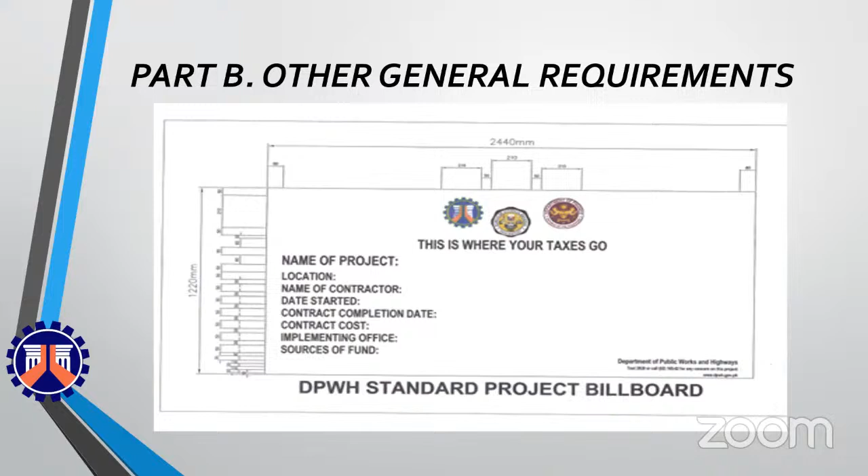Minimum material testing equipment for small contractors, for Contract ID Numbers 25D034, 42, 44, 37, and 58. Showing you the minimum materials testing equipment for small contractors.

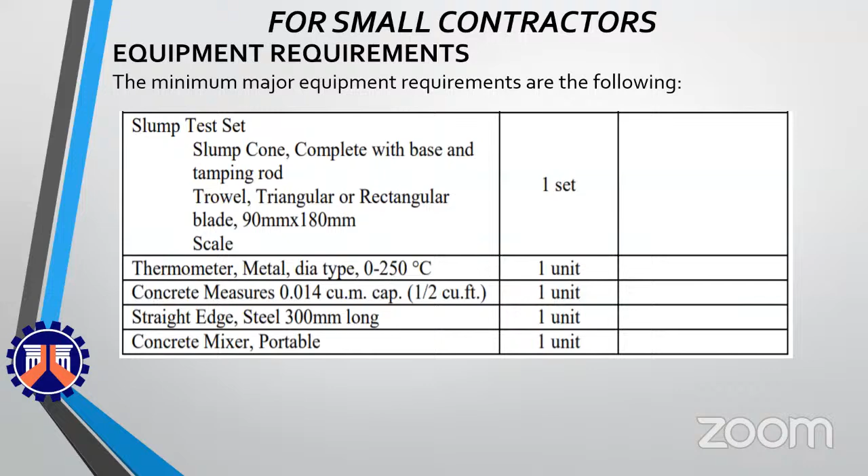Minimum material testing equipment for medium contractors for contract ID numbers 25D033, 30, 31, and 59. Showing you the minimum materials testing equipment for medium contractors.

Contract ID number 25D033, construction of Dasmariñas General Trias Tanza Diversion Road, General Trias Section, Cavite. Showing you the numbers and map, key map, vicinity map, layout plan, general plan, and general elevation.

Typical section, reinforcement details, weephole detail, and sheet pile detail.

For the scope of work, widening of a single span two-lane carriageway bridge with a length of 40 linear meters and width of 10 meters. AASHTO pre-stressed concrete girder type 6, including reinforced concrete deck slab, sidewalk, and post and railing as superstructure, supported by two 1.8-meter diameter bored piles at abutments with craneway, slope protection, and other miscellaneous items included.

Construction of reinforced concrete revetment with a total length of 101 linear meters, height of 5.52 meters, with PVC weep holes staggered at 2 meter on center, including diversion of waterways and earthworks.

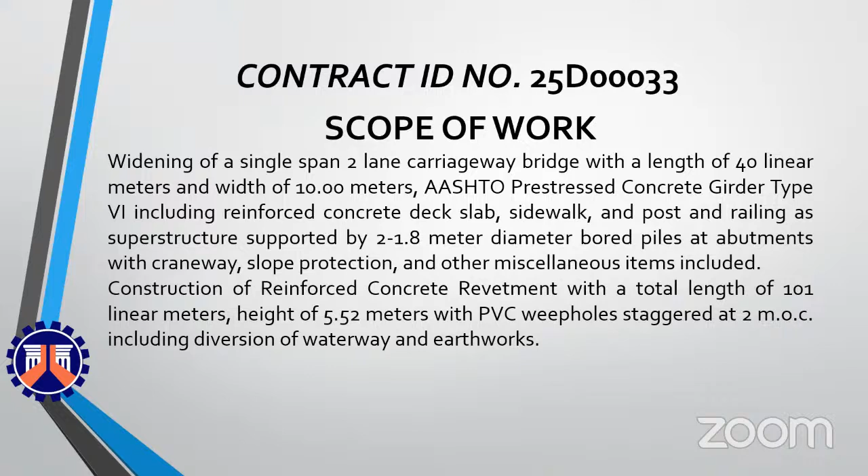Showing you the equipment requirements. For the manpower requirements, project manager and foreman should have at least 3 years of similar experience and 5 years of total work experience. Project engineer must be a DPWH accredited provisional engineer. Materials engineer must be DPWH accredited materials engineer 1, and construction safety officer with COSH training.

The approved budget for the contract is 52,894,545 pesos and contract duration is 225 calendar days. Major category of works: bridge construction, concrete superstructure with cast-in-place piles. Showing you the similar categories of works. The source of fund is FY 2025 NEP for DPWH Infra Program.

Contract ID number 25D034. Lumban Bridge along Calamba, Santa Cruz, Famy Junction Road. Showing you the vicinity map, Calabarzon map, key map, general section, and general plan.

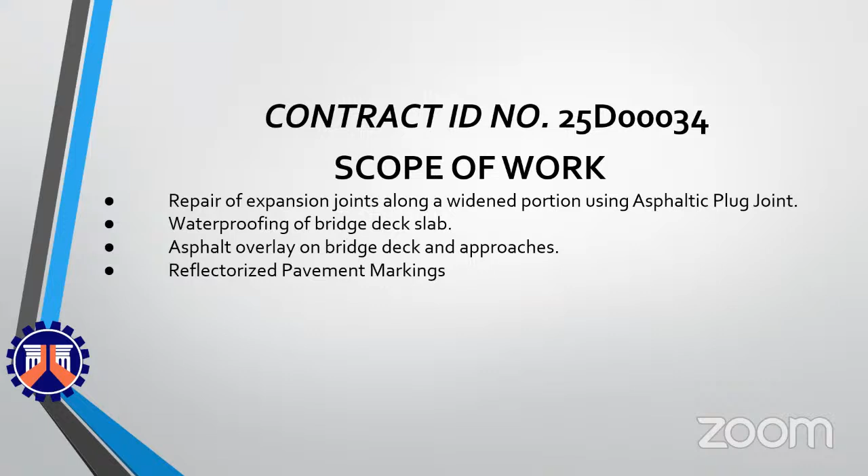Scope of work: repair of expansion joints along a widened portion using asphaltic plug joint, waterproofing of bridge deck slab, asphalt overlay on bridge deck and approaches, and reflectorized pavement markings.

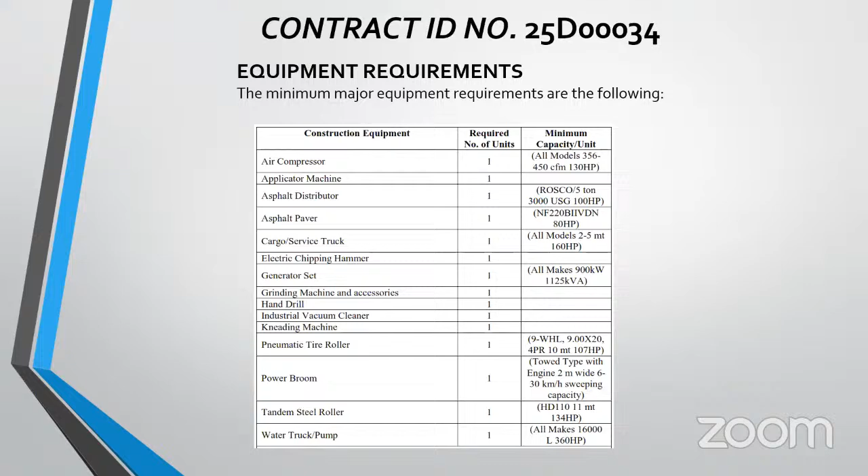Showing you the equipment requirements. The minimum work experience requirements for the key personnel are the following. The approved budget for the contract is 28,950,000 pesos and contract duration is 150 calendar days.

Major category of works: bridges, retrofitting, concrete superstructure without piles. Showing you the similar categories of works. The source of fund is FY 2025 NEP for DPWH Infra Program.

Contract ID number 25D042, Irigan Bridge along Maharlika Highway. Showing you the key map, Calabarzon map, vicinity map, location map, and layout plan.

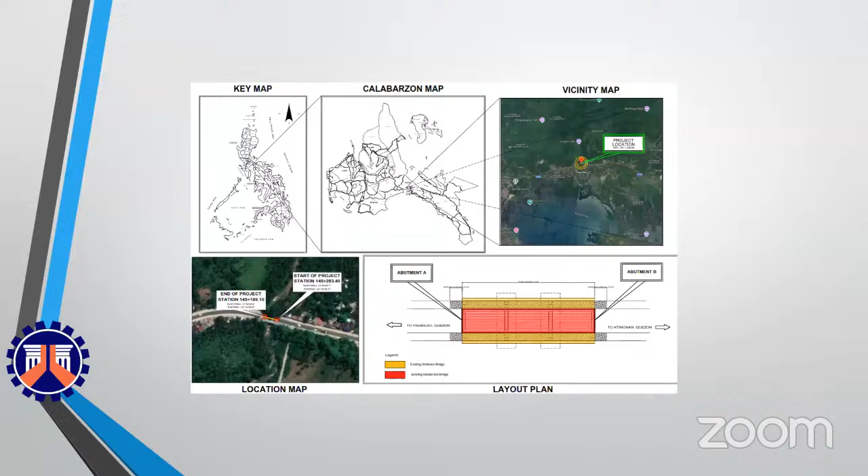General plan, general elevation, and general section. Revetment details, typical cross-section, and sheet pile details.

Pile cap reinforcement details, weep hole details, and revetment reinforcement details.

Scope of work: repair of slope protection structure, which includes construction of 25 linear meters reinforced concrete revetment on both sides with a height of 5 meters and 0.3 meters thickness, using 16 millimeter diameter top and bottom reinforcing bars and 12 millimeter diameter horizontal bars, with PVC weep holes staggered at 2 meter on center.

Resting on 0.5 meter by 0.7 meter reinforced concrete pile cap with 4.5 meters Type 2 steel sheet pile, using 16 millimeter diameter reinforcing bars with 12 millimeter diameter ties, including earthworks, removal of structure, and application of two-layer carbon fiber sheets on deck slab.

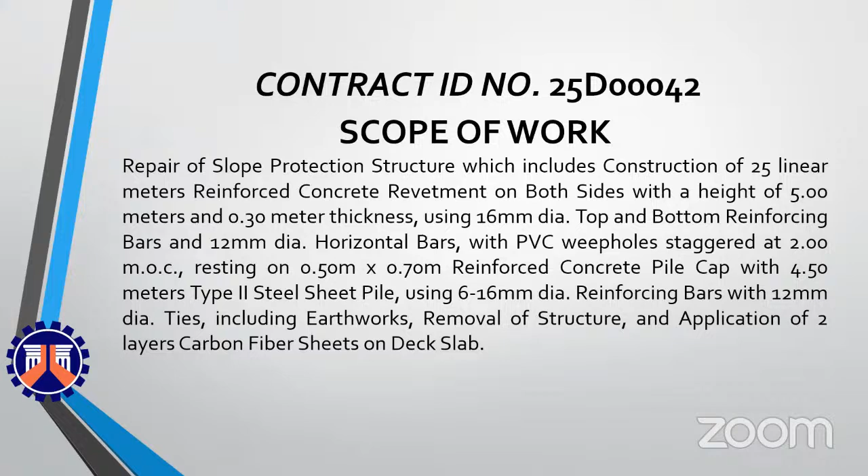Showing you the equipment requirements and manpower requirements. The approved budget for the contract is 7,720,000 pesos with a contract duration of 105 calendar days.

Major category of works: bridges, retrofitting, concrete superstructure without piles. Showing you the similar categories of works. The source of fund is FY 2025 NEP for DPWH Infra Program.

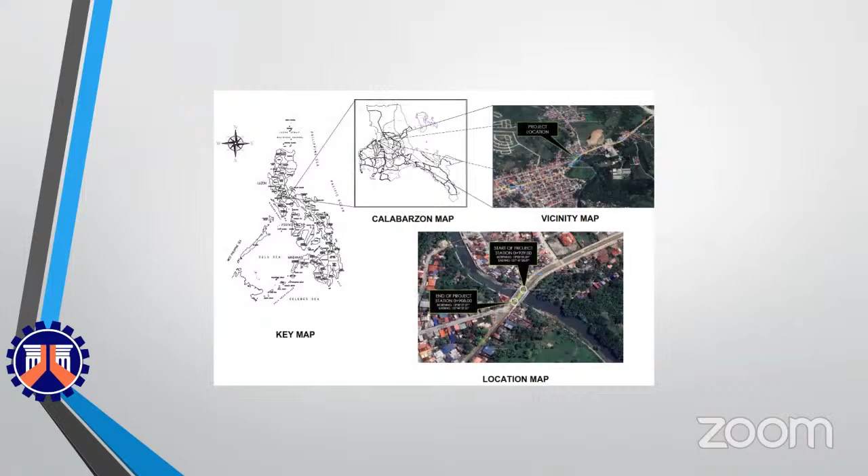Contract ID number 25D044, Tambak Bridge along Maharlika Highway. Showing you the key map, Calabarzon map, vicinity map, location map, general plan, general elevation, general superstructure section details, and detail of stone masonry.

Scope of work: retrofitting of a 4-lane one-span bridge with a total length of 31 linear meters and width of 15.2 meters. The use of asphaltic plug joints for repairs of longitudinal and transverse expansion joints, carbon fiber below deck slab, waterproofing on deck slab, asphalt works at bridge deck slab, reflectorized pavement markings, and construction of stone masonry.

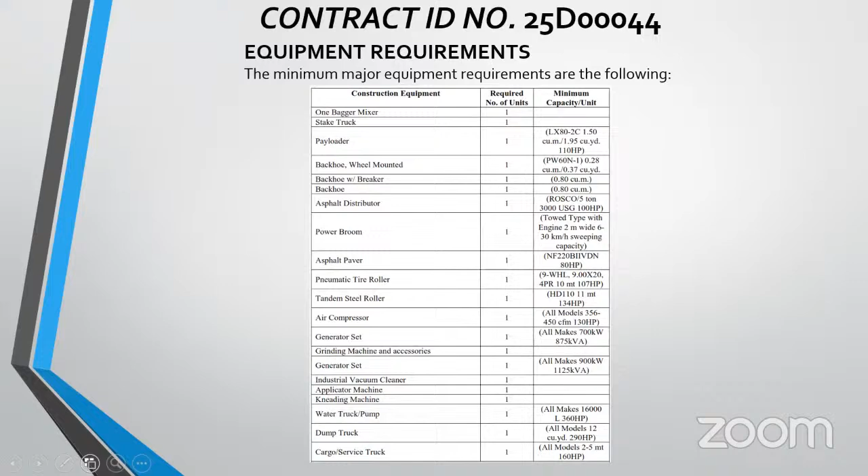The minimum major equipment requirements are the following. Showing you the manpower requirements. The approved budget for the contract is 9,650,000 pesos and contract duration is 105 calendar days.

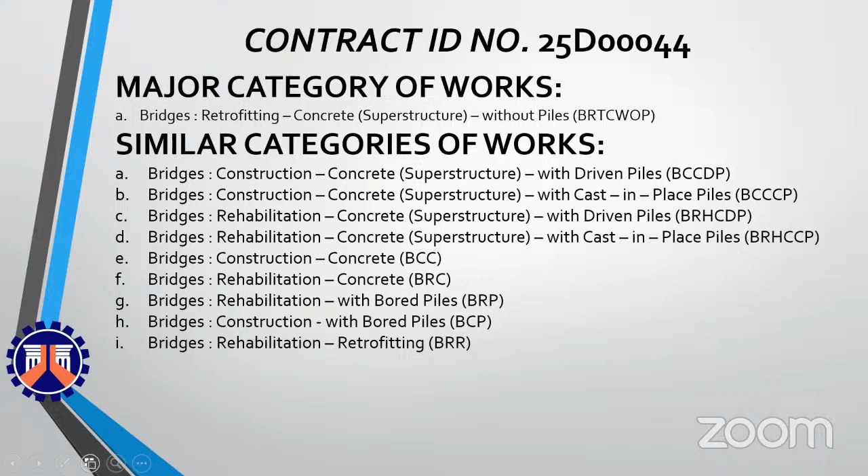Major category of works: bridges, retrofitting, concrete superstructure without piles. Showing you the similar categories of works. The source of fund is FY 2025 NEP for DPWH Infra Program.

Contract ID number 25D030. Construction of flood control along the Lobo River downstream, Phase 1, Barangay Lagadlarin, Lobo, Batangas. Showing you the key map, Calabarzon map, vicinity map, location map, typical section, reinforcement details, and sheet pile details.

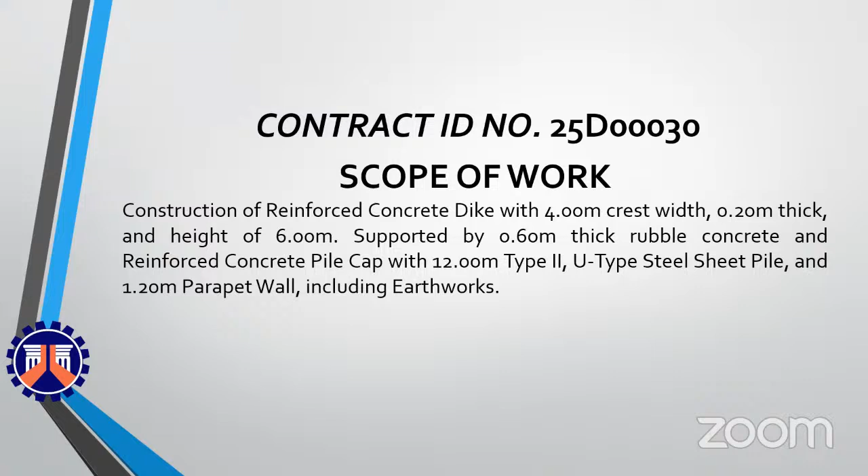Scope of work: construction of reinforced concrete dike with 4-meter crest, 0.2 meter thick, and height of 6 meters, supported by 0.6 meter thick rubble concrete and reinforced concrete pile cap with 12-meter Type 2 U steel sheet pile and 1.2 meter parapet wall, including earthworks.

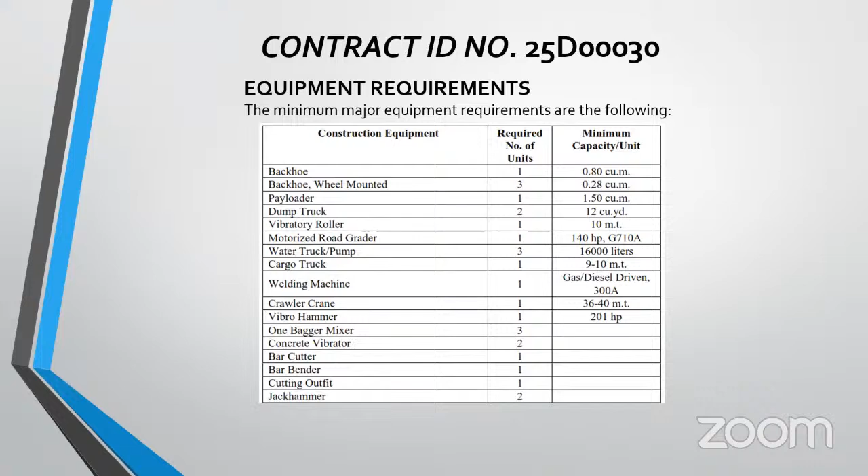Showing you the equipment requirements. For the manpower requirements, project manager and foreman should have at least 3 years of similar experience and 5 years of total work experience.

Project engineer and materials engineer must be DPWH accredited project engineer 2 and materials engineer 2 respectively. Construction safety officer with COSH training.

Approved budget for the contract is 193 million pesos and contract duration is 300 calendar days. Major category of works: flood control, construction of slope protection using structural measures. Examples are revetment, retaining structures, and wirenet. Showing you the similar categories of works.

The source of fund is FY 2025 NEP for DPWH Infra Program. Contract ID number 25D031, construction of flood control along the Bor River downstream, Phase 2, Barangay Lagadarin, Lobo, Batangas. Showing you the key map, Calabarzon map, vicinity map, and location map.

Typical section, reinforcement details, and sheet pile details. Scope of work: construction of reinforced concrete dike with 4-meter crest width, 0.2-meter thick, and height of 6 meters, supported by 0.6-meter thick rubble concrete and reinforced concrete pile cap with 12-meter type 2 U-type steel sheet pile and 1.2-meter parapet wall, including earthworks.

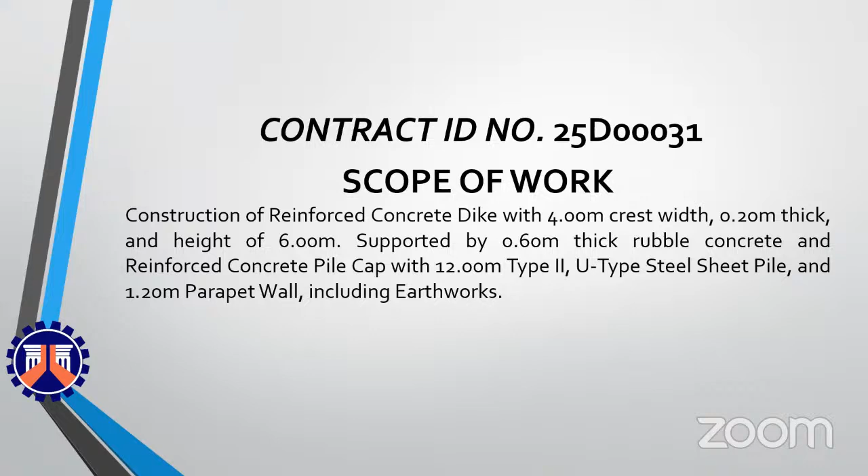The minimum major equipment requirements are the following. Showing you the manpower requirements. The approved budget for the contract is 193 million pesos and contract duration is 300 calendar days.

Major category of works: flood control, construction of slope protection using structural measures. Examples are revetment, retaining structures, and wirenet. Showing you the similar categories of works.

The source of fund is FY 2025 NEP for DPWH Infra Program. Contract ID number 25D037, Kanda Bridge along Maharlika Highway. Showing you the key map, Calabarzon map, location map, and vicinity plan.

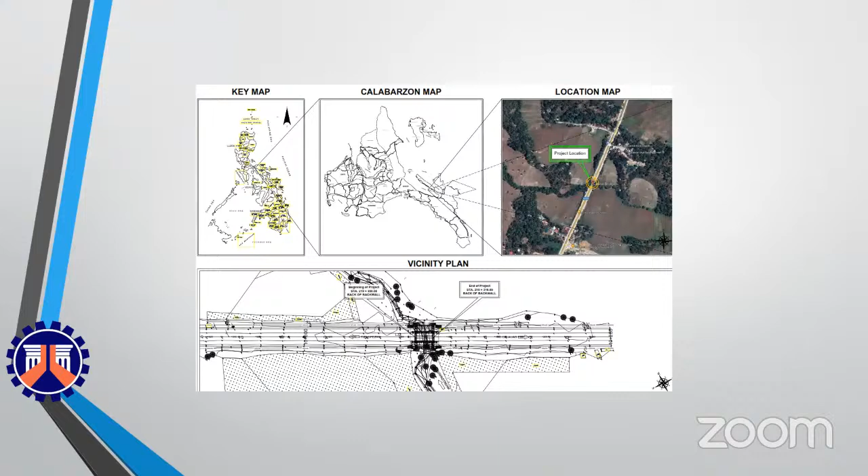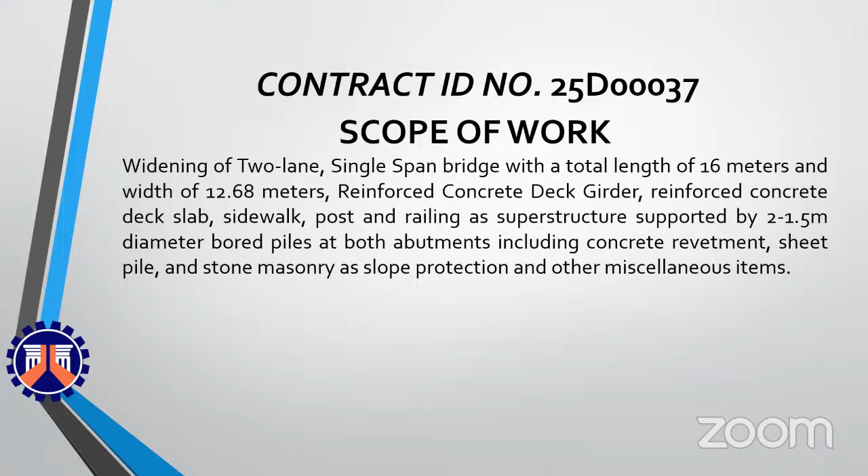General plan, general elevation, and general section at abutments. Scope of work: widening of 2-lane, single-span bridge with a total length of 16 meters and width of 12.68 meters, reinforced concrete deck girder, reinforced concrete deck slab, sidewalk, post and railing as superstructure, supported by two 1.5-meter diameter bored piles at both abutments, including concrete revetment, sheet pile, and stone masonry as slope protection and other miscellaneous items.

Showing you the equipment requirements. For manpower requirements, project manager and foreman should have at least 2 years of similar experience and 5 years of total work experience. Project engineer and materials engineer must be a DPWH accredited project engineer 1 and DPWH accredited materials engineer 1 respectively. Construction safety officer with COSH training.

The approved budget for the contract is 24,125,000 pesos and contract duration is 184 calendar days. Major category of works: bridges, construction, concrete superstructure with cast-in-place piles. Showing you the similar categories of works.

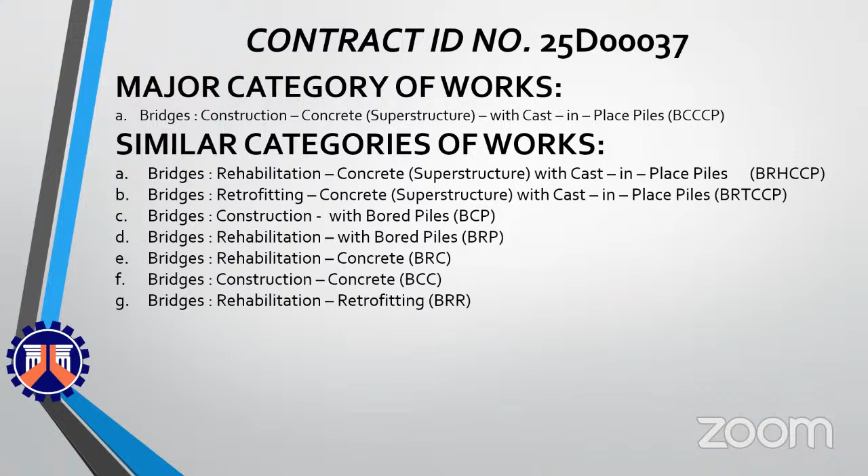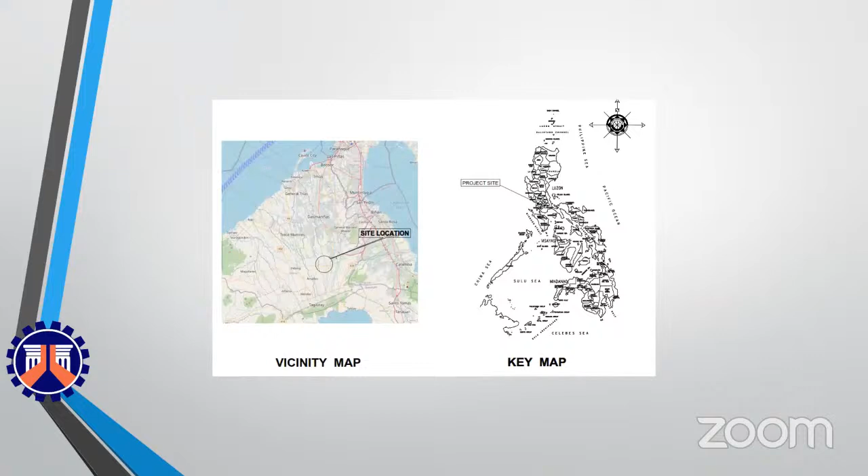The source of fund is FY 2025 NEP for DPWH Infra Program. Contract ID number 25D058, General Aguinaldo Magallanes, Nasugbu Road, East-West Road, Silang Section, Cavite. Showing you the vicinity map and key map. Straight line diagram.

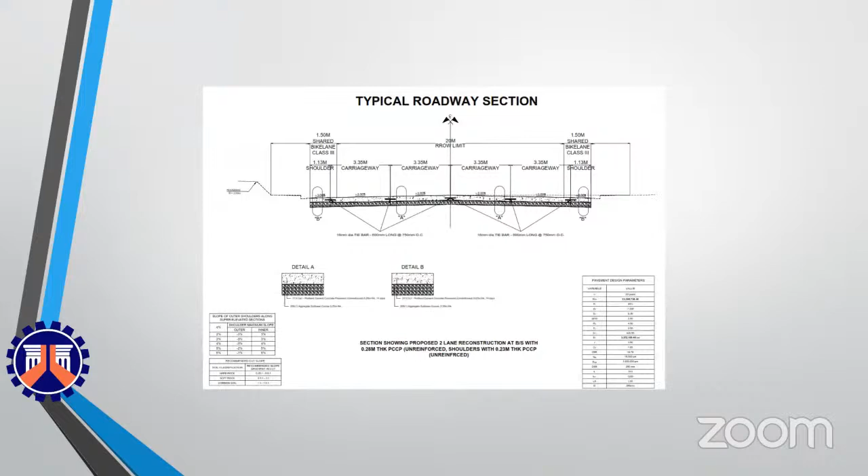Typical roadway section. Roadway lighting plan.

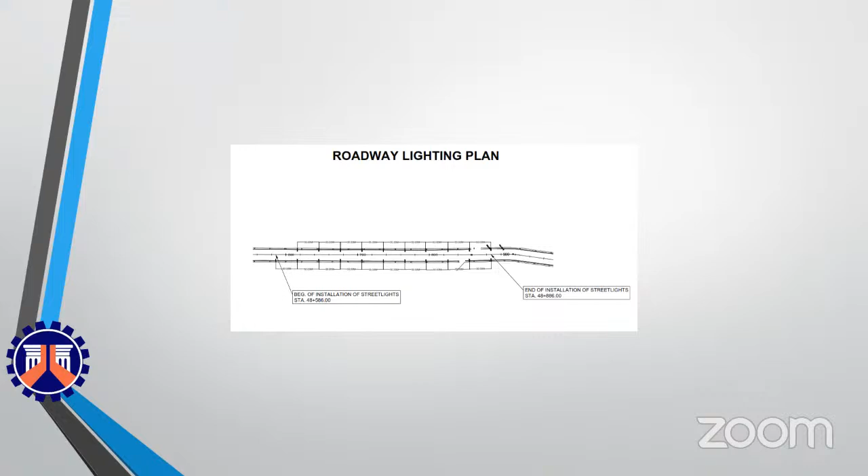For the scope of work, installation of 20 units, 100 watts solar streetlights spaced at 30 meters from station 48 plus 586 to station 48 plus 886.

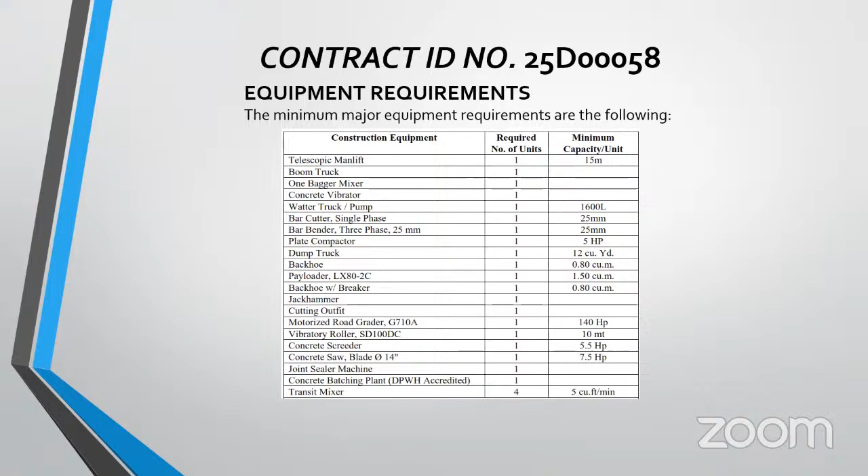The minimum major equipment requirements are the following. For the manpower requirements, project manager and foreman should have at least 3 years of similar experience and 5 years of total work experience. Project engineer and materials engineer must be a DPWH accredited provisional engineer and DPWH accredited materials engineer 1, respectively. Construction safety officer with COSH training.

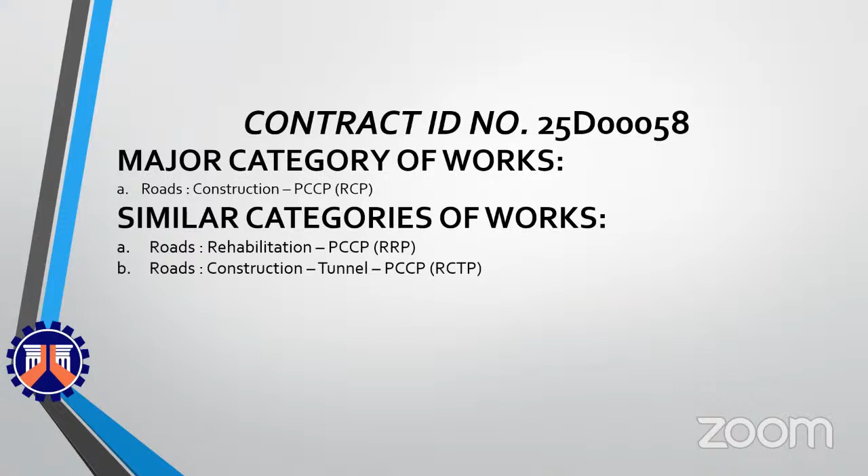The approved budget for the contract is 14,475,000 pesos and contract duration is 120 calendar days. Major category of works: roads, construction, PCCP. Showing you the similar categories of works.

The source of fund is FY 2025 NEP for DPWH Infra Program. Contract ID number 25D059, Silangan Road, CA Yulo Avenue, connecting South Luzon Expressway leading to the industrial parks, Canlubang, Calamba City, Laguna.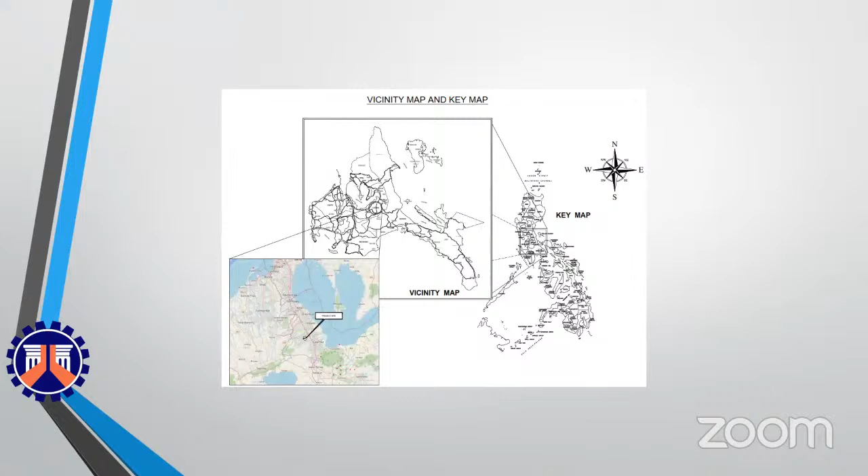Showing you the vicinity map and key map. Layout map and straight line diagram. Typical roadway section.

Scope of work for Section 1: proposed reconstruction of off-carriageway with 0.57-meter curb and gutter, 0.76-meter sidewalk, installation of 1000 millimeter diameter concrete, clay, plastic, and fiber pipe with manholes, and installation of solar LED streetlights on left side.

For Section 2, proposed reconstruction of off-carriageway with 0.67-meter curb and gutter, 2.83-meter sidewalk and bike lane, Class 1 shared, 0.5-meter planting strips, and installation of 1000 millimeter diameter concrete, clay, plastic, and fiber pipe with manholes on left side.

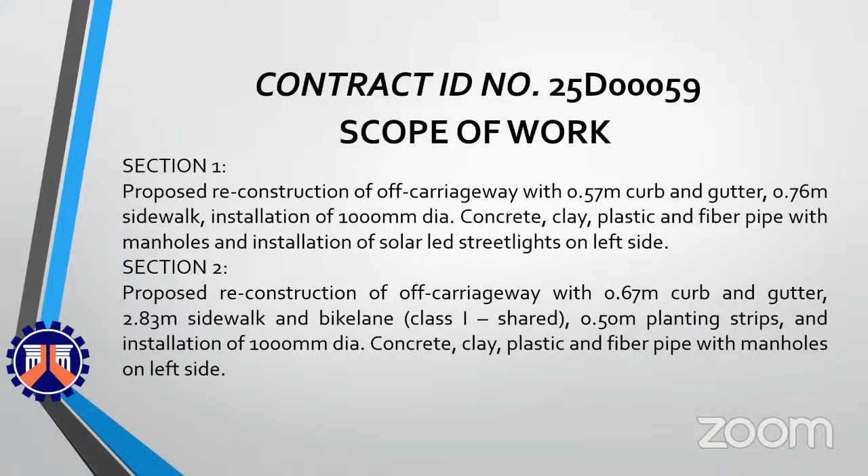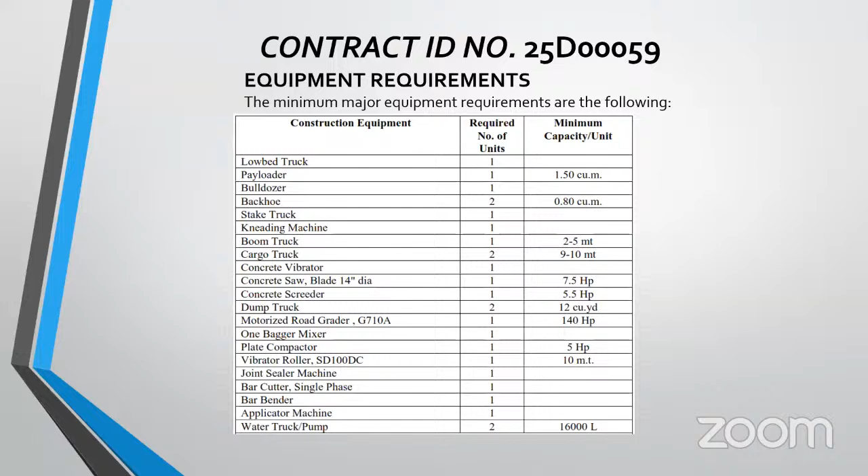The minimum major equipment requirements are the following. For manpower requirements, project manager and foreman should have at least 2 years of similar experience and 5 years of total work experience. Project engineer and materials engineer must be a DPWH accredited project engineer 1 and materials engineer 1 respectively. Construction safety officer with COSH training.

The approved budget for the contract is 113,844,910 pesos, and contract duration is 285 calendar days. Major category of works: flood control, construction, drainage, closed and open conduits. Showing you the similar categories of works.

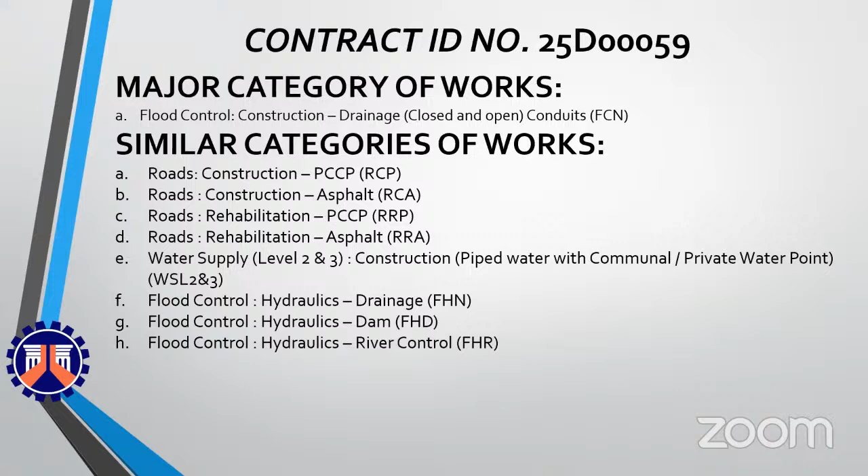The source of fund is FY 2025 NEP for DPWH Infra Program. Thank you, that's all po for the technical component of the projects under construction division.

Good morning po. I am Engineer CJ Sota from the Construction Division, and I'm going to present first the financial documents and component of the pre-bid under the Maintenance and Construction Division, while the technical component for the projects under the Maintenance Division will be discussed later on.

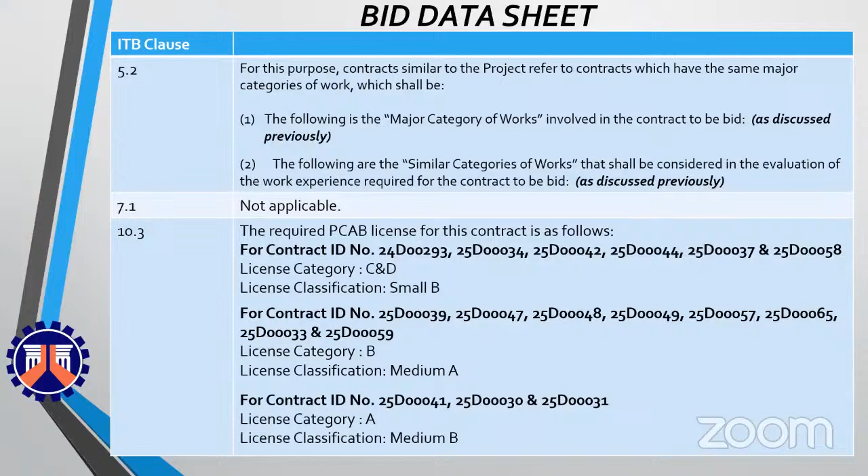Starting with bid data sheet. ITB clause number 10.3, the required PCAB license for this contract is as follows. For contract ID number 24D0293, 25D034, 42, 44, 37, and 25D058, license category C and D and license classification small B. For contract ID numbers 25D039, 47, 48, 49, 57, 65, 33, and 25D059, license category B and license classification medium A. And for contract ID numbers 25D041, 30, and 25D031, license category A and license classification medium B.

ITB clause number 22, bid submission may be done manually or electronically or online. However, bidders should only select one mode of submission, either manual or electronic. The address for receipt of bids submitted manually is at Bidding Room, DPWH Region 4A, Canlubang Interchange, Barangay Mayapa, City of Calamba, Laguna, and electronically should be submitted at electronicbids_R4A at dpwh.gov.ph. The deadline for receipt of bids is on November 12, 2024 at 10 a.m.

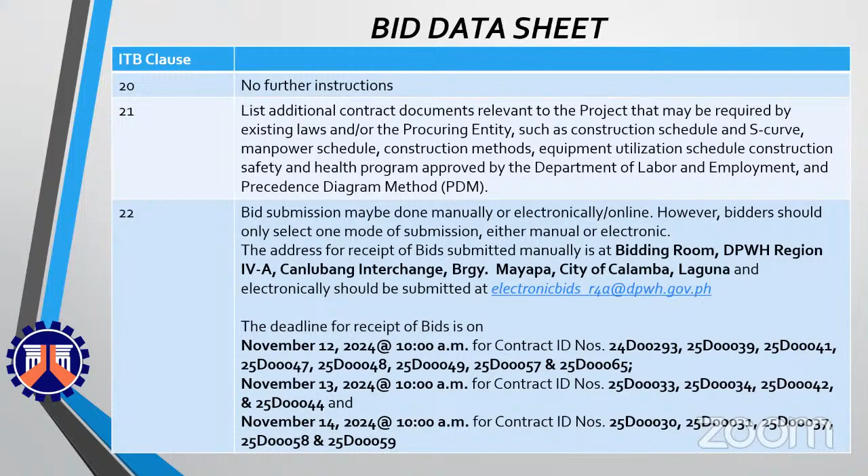for contract ID numbers 24D0293, 25D039, 41, 47, 48, 49, 57, and 25D065. And on November 13, 2024 at 10 a.m. for contract ID numbers 25D033, 34, 42, and 25D044. And on November 14, 2024 at 10 a.m., contract ID number 25D030, 31, 37, 58, and 25D059. For bids to be submitted electronically or online, the following procedures should be observed following the Department Order number 87, series of 2020.

Special conditions of contract. GCC clause number 4.1, the procuring entity shall give possession of the site to the contractor upon the receipt of the notice to proceed. The start date should not be later than 7 calendar days from its issuance date of receipt of the notice to proceed.

GCC clause 7.2. In case of permanent structures such as buildings of types 4 and 5 as classified under the National Building Code of the Philippines and other structures made of steel, iron, or concrete which comply with the relevant structural codes, such as but not limited to steel, concrete bridges, flyovers, aircraft movement areas, ports, dams, tunnels, filtration and treatment plants, sewerage systems, power plants, transmission and communication towers, railway system, and other similar permanent structures: 15 years, for contract ID numbers 24D0293, 25D039, 47, 48, 49, 65, 33, 34, 42, 44, and 25D037.

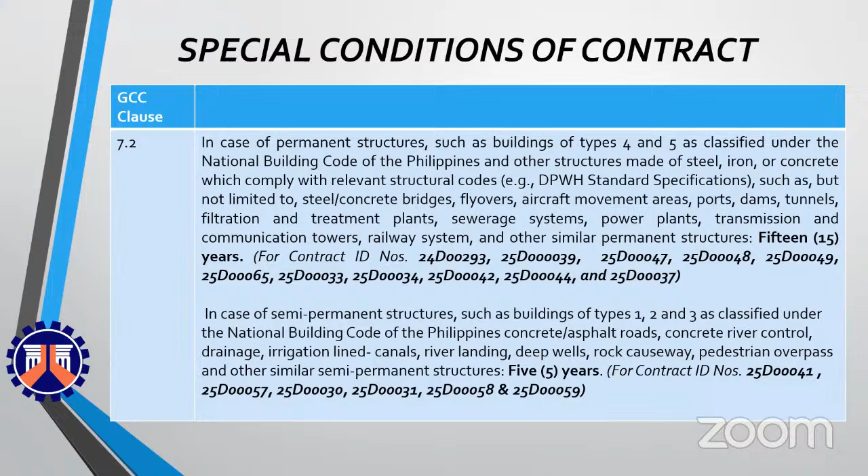In case of semi-permanent structures such as buildings of types 1, 2, and 3 as classified under the National Building Code of the Philippines: 5 years, for contract ID numbers 25D041, 57, 30, 31, 58, and 25D059.

Bid security. Bidders are allowed to choose any of the following forms: cash, cashier's check, manager's check, issued by a universal or commercial bank, 2% of ABC. Bank draft, guarantee, or irrevocable letter of credit issued by a universal or commercial bank. If issued by a foreign bank, it shall be confirmed or authenticated by a universal or commercial bank, 2% of ABC. Surety bond callable upon demand, issued by a surety or insurance company duly certified by the Insurance Commission as authorized to issue such security, 5% of ABC. And bid securing declaration. Important notice: bids and bid securities shall be valid within 120 calendar days from the opening of bids. Amount of bank guarantee, irrevocable letter of credit, cash, cashier's check, manager's check, 2% of ABC.

For contract ID number 24D0293, 96,500 pesos. Contract ID number 25D039, 2,895,000 pesos. 25D041, 3,860,000 pesos. 25D047, 1,930,000 pesos. 25D048, 2,045,800 pesos. 25D049, 1,717,700 pesos. 25D057, 2,827,450 pesos.

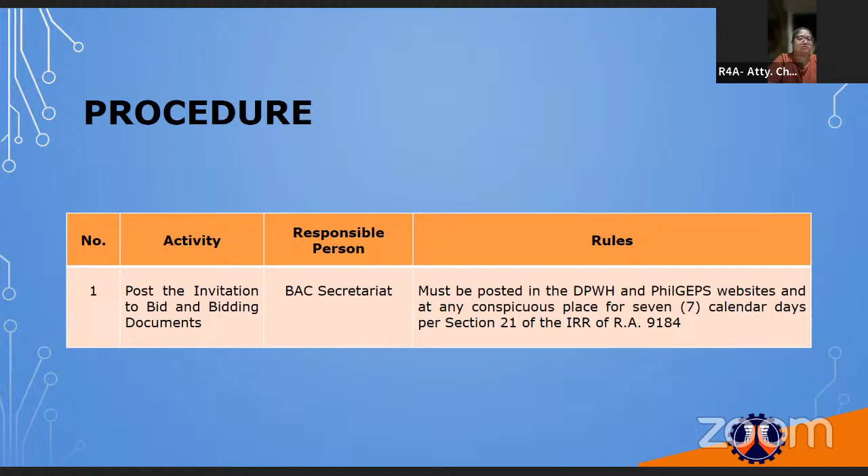Upon posting of the invitation to bid and bidding documents, the BAC Secretariat shall create the contract ID folder in the eBid portal.

The contractor shall purchase the bidding documents per Section 17.4 and Appendix 8, Guidelines on the Sale of Bidding Documents of the IRR of RA 9184. The applicable fee for the specific project is indicated in the invitation to bid.

Prior to the deadline of submission of bids, the prospective bidders shall send an email with subject 'official receipt for contract ID' to electronicbids_R4A@dpwh.gov.ph. Attached to the said email is the copy of the official receipt of purchase of bidding documents in PDF format, with file name in the format PCAB ID underscore contract ID underscore official receipt dot PDF.

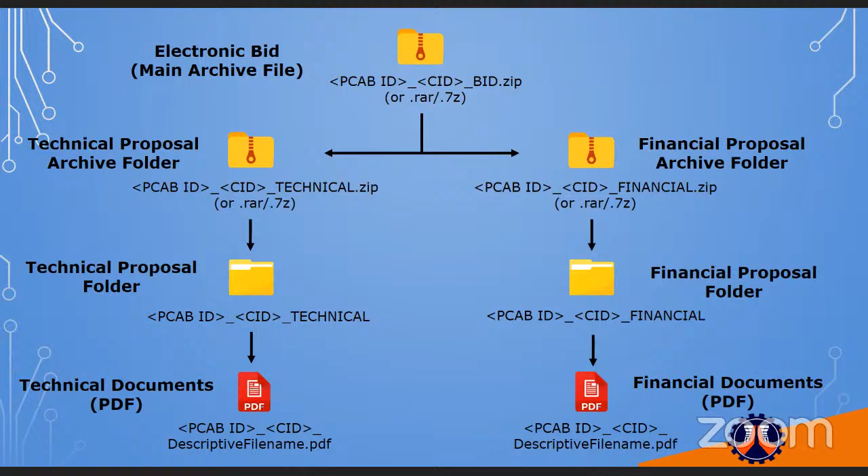Subsequently, each of the technical and financial components file folders shall be compressed, password protected, and named in the format PCAB ID underscore contract ID underscore technical dot zip or .rar or .7z, and PCAB ID underscore contract ID underscore financial dot zip or .rar or .7z respectively. Each file contained in the technical and financial components file folders shall be in PDF format, either scanned or exported or published, with file name in the format PCAB ID underscore contract ID underscore descriptive file name dot PDF.

The compressed archive file folders of the technical and financial components shall be compiled in a password-protected compressed archive main file folder with file name in the format PCAB ID underscore contract ID underscore bid. In case the total file size of the main archive file folder is more than the allowable size of an attachment per email of the prospective bidder's email service provider, they shall need to split its electronic bid into two or more password-protected compressed archive main file folders.

The email submitting the prospective bidder's electronic bid should have a subject in the format bid submission for contract ID. In case of multiple compressed archive main file folders, it shall be submitted in multiple emails, each with subject in the format bid submission 1/2 for contract ID, bid submission 2/2 for contract ID.

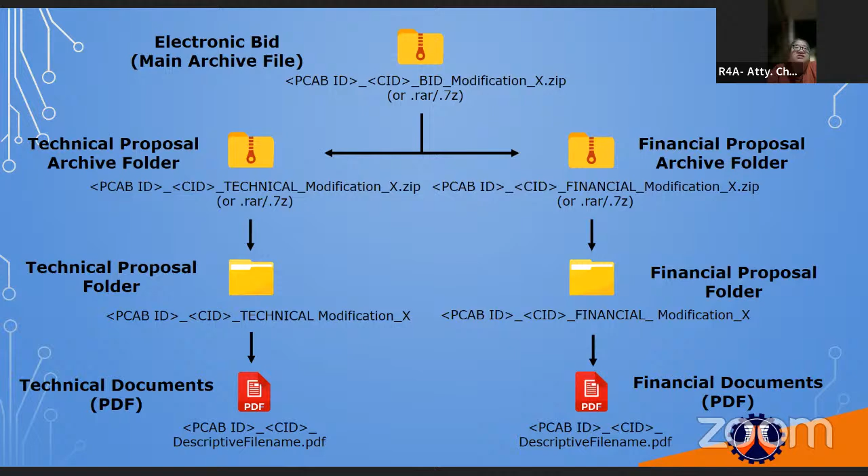In case a prospective bidder that have purchased a bidding document decided not to participate, he may choose to submit his letter of non-participation manually or electronically. In case of electronic submission, the contractor shall send an email with the subject non-participation for contract ID with the letter of non-participation as attachment with file name PCAB ID underscore contract ID underscore non-participation.pdf. This email should be sent to electronicbids underscore R4A at dpwh.gov.ph before the deadline for bid submission.

Bids may only be withdrawn prior the deadline for bid submission. In case of withdrawal of an electronic bid, the bidder shall send an email with the subject bid withdrawal for contract ID and the letter of bid withdrawal in PDF format with file name PCAB ID underscore contract ID underscore bid withdrawal.pdf shall be attached. This email should be sent to electronicbids underscore R4A at dpwh.gov.ph before the deadline for bid submission.

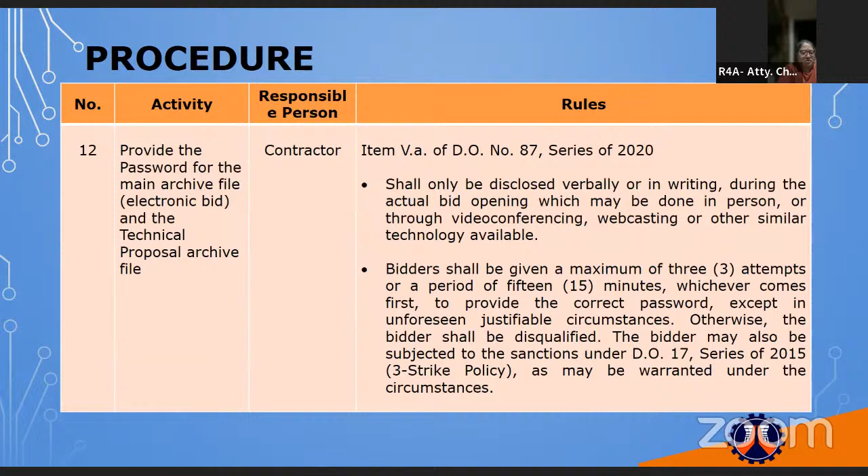All electronic bids, password-protected compressed archive main file folders shall be opened first for the opening of the technical component compressed archive file folders. This shall be followed by the opening of the bids submitted manually for the opening of the technical component envelopes.

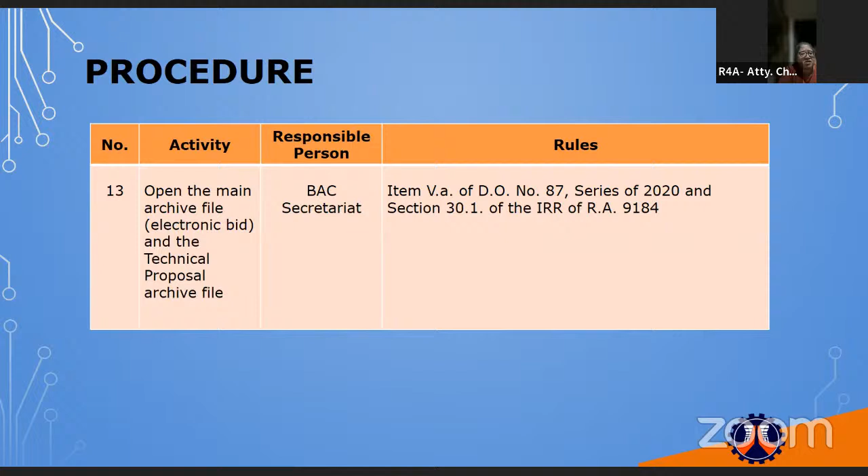The same procedures apply for the financial component compressed archive file folders and financial component envelopes. The BAC Secretariat shall open the Financial Proposal Archive file.

Notes and reminders for the contractors in the preparation and submission of bids. Only bidders with system-accepted proof of payment shall be allowed to submit their electronic bids, which shall not be beyond the deadline specified for the submission of bids.

An email shall also be received by a prospective bidder in instances where their sent email related to the submission of electronic OR of purchase of the bidding documents has an incorrect subject contract ID, meaning a corresponding folder with the same contract ID does not exist in the eBid portal; if it has no attachment; if it has an attachment but not in the prescribed format; if it has more than one attachment; or if it was received after the deadline of bid submission.

For the foregoing cases, the prospective bidders should rectify or correct the noted deficiencies to comply with the requirements for its electronic bid to be accepted.

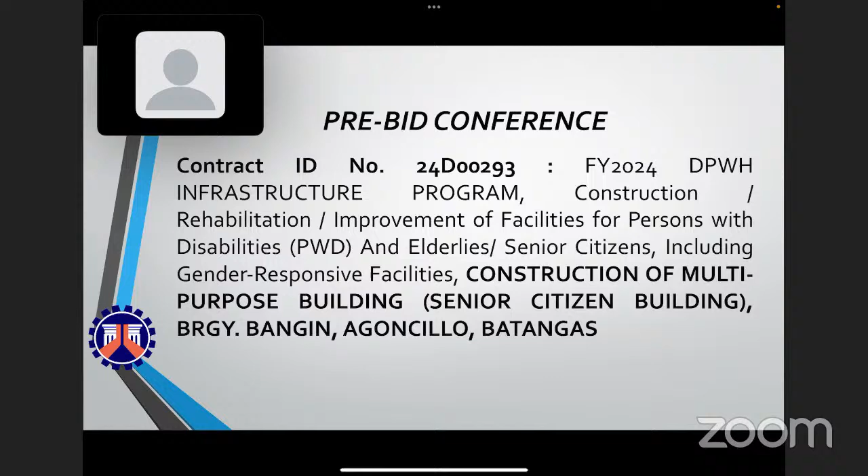For the scope of work, the scope of works for the construction of multipurpose building are earthworks, plain and reinforced concrete work, finishing and other civil work, and electrical and auxiliaries.

For the equipment requirements, the minimum major equipment requirements are the following.

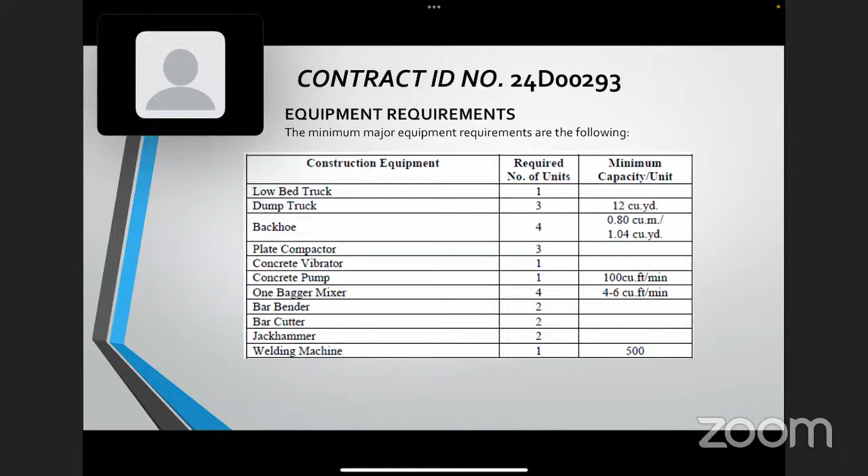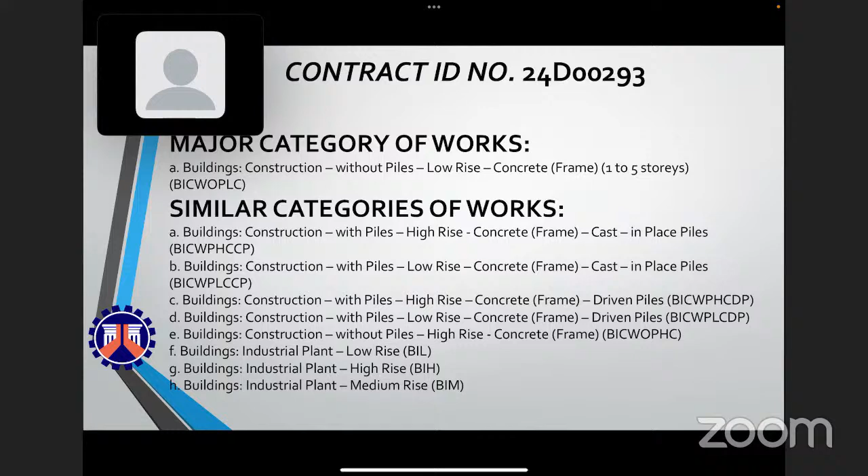The approved budget for the contract is 4,825,000 pesos, and the contract duration is 210 calendar days. Showing you the major and similar categories of works. The source of fund is FY 2024 RA 11975, regular 2024 current.

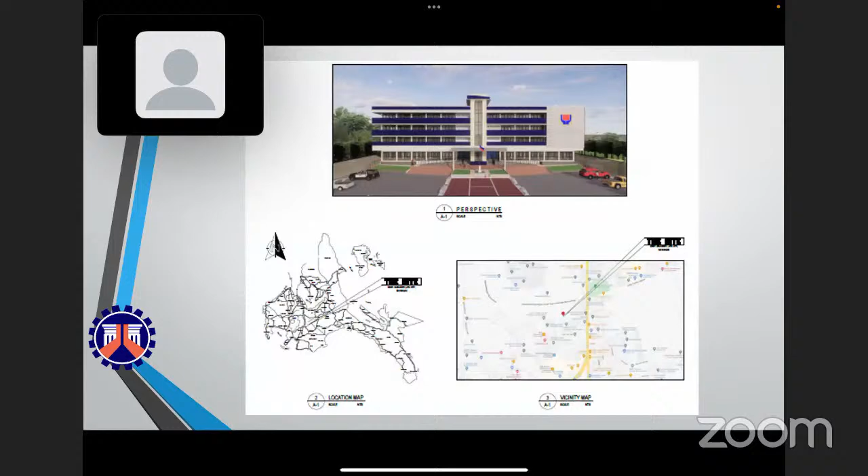For the scope of work, for earthworks: clearing and grubbing, structure excavation, embankment from borrow, gravel fill, 3,000 psi and 4,000 psi structural concrete, reinforced grade steel, formworks, soil poisoning, and damp proofing.

For plumbing: fixtures, and cistern.

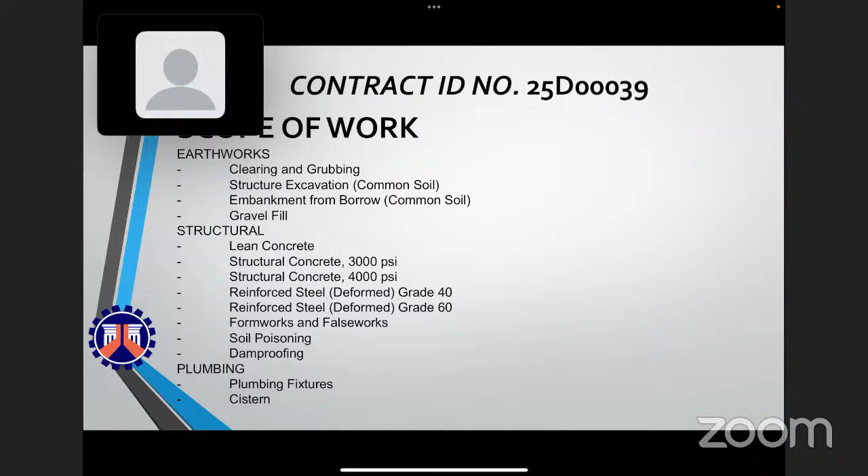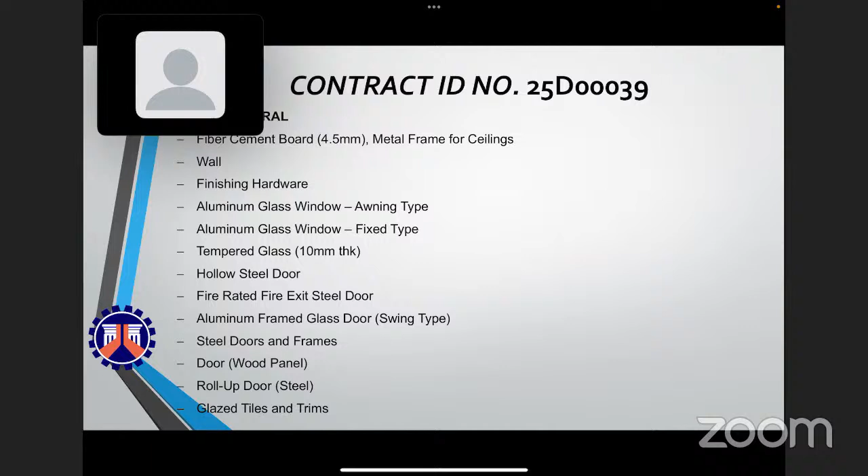For architectural: fiber cement board, metal frame for ceilings, wall finishing hardware, aluminum glass window, tempered glass, hollow steel door, fire-rated fire exit steel door, aluminum frame glass door, steel doors and frames, wood panel door, roll-up steel door, glazed tiles and trims, unglazed tiles, granite tiles, cement floor finish plain, floor finishes, cement plaster finish, painting works for masonry and concrete, wood and steel, CHB non-load bearing 150mm, beaver blocks, metal steel plates, and railing.

For electrical: generator, single phase, standby, and lighting fixtures and lamps. For electronics and communication: CCTV system. For mechanical: electric elevator, 501 to 1,000 kilograms, and air conditioning package split type.

For equipment requirements, the minimum major equipment requirements are the following.

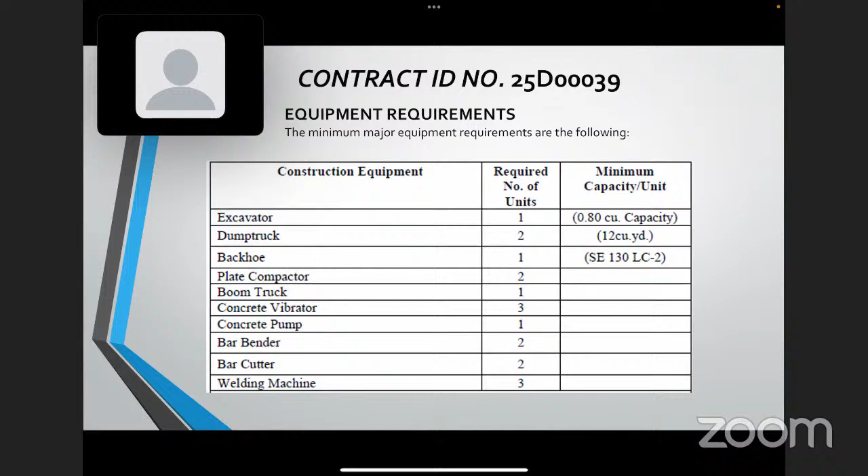For the manpower requirement, the minimum work experience requirements for the key personnel are the following.

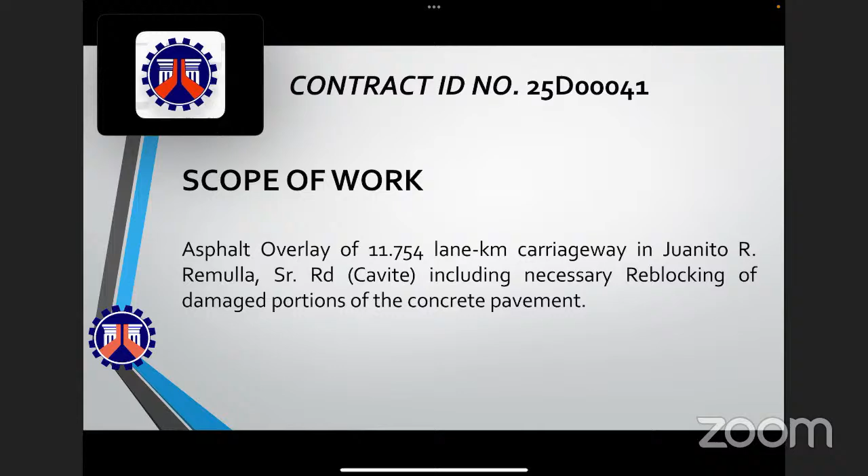For the scope of work: asphalt overlay of 11.754 lane kilometer carriageway in Juanito R. Remulla Senior Road, Cavite, including necessary reblocking of damaged portions of the concrete pavement.

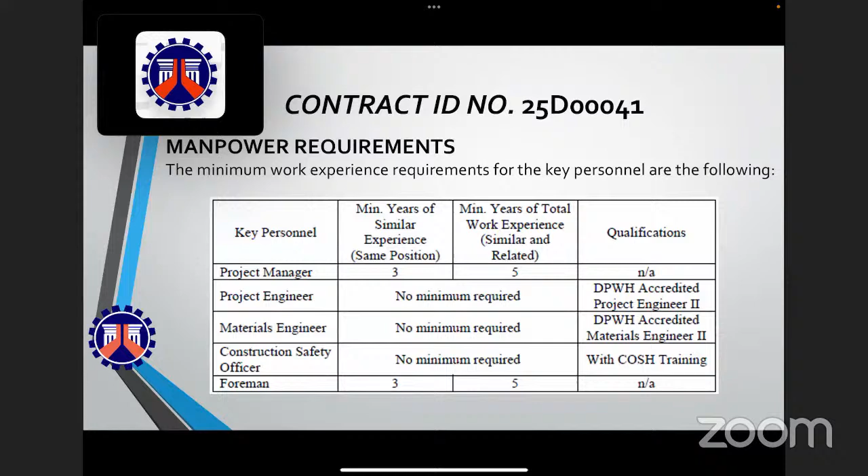For the scope of work, for architectural: installation of ceiling at all floor levels except third floor, installation of toilet partition, application of paint finish at exterior wall and ceiling at all floor levels except third floor, installation of reflective insulation, sun buffer, and site development.

For plumbing: installation of water pumping system. For electrical: installation of generator, solar power, lighting fixtures and wiring devices at all floors except third floor, and installation of service entrance post.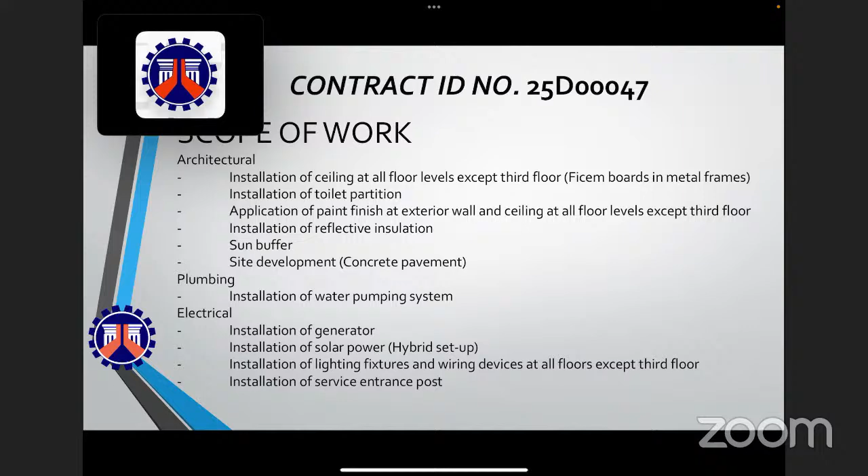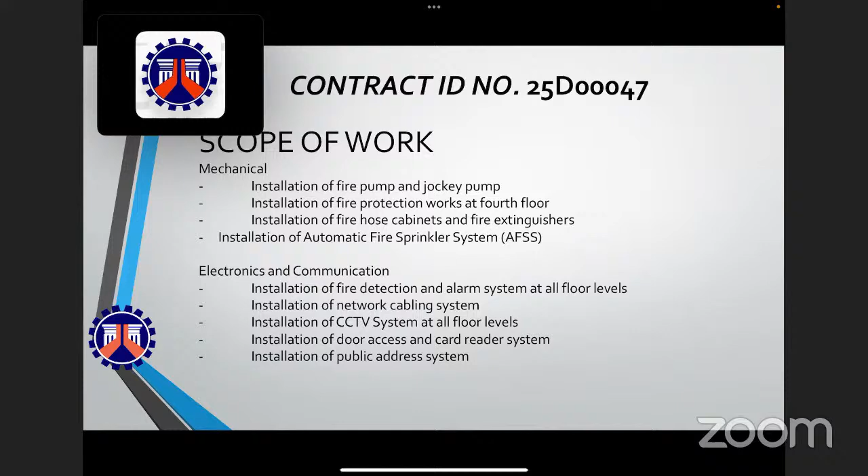For mechanical: installation of fire pump and jockey pump, fire protection works at fourth floor, fire hose cabinets and fire extinguishers, and installation of automatic fire sprinkler system. For electronics and communication: installation of fire detection and alarm system at all floor levels, network cabling system, CCTV system at all floor levels, door access and card reader system, and public address system.

For the equipment requirements, the minimum major equipment requirements are the following. Manpower requirements: the minimum work experience requirements for the key personnel are the following.

The approved budget for the contract is 96,500,000 pesos and the contract duration is 300 calendar days. Showing you the major and similar categories of works. The source of fund is FY 2025 NEP for DPWH Infra Program.

For contract ID number 25D00048, construction of 5-story AFP quarters, Building 1, Camp Guillermo Nakar, Lucena City, Quezon, Phase 4. Showing you the perspective, location map, vicinity map, and site development plan.

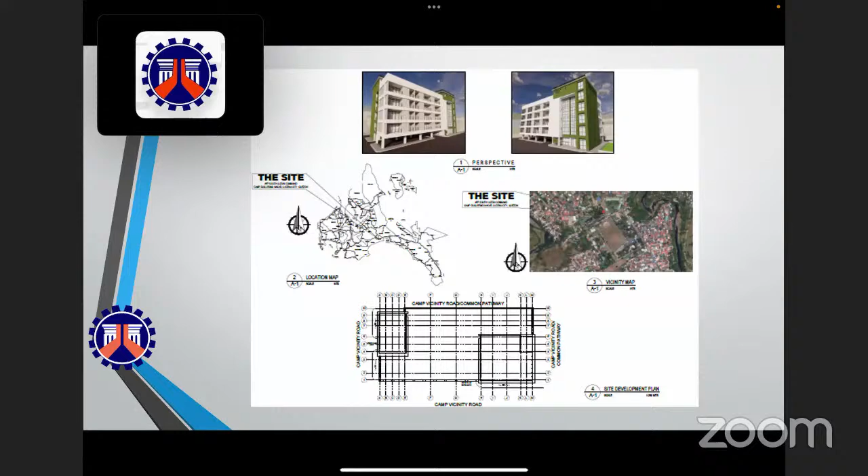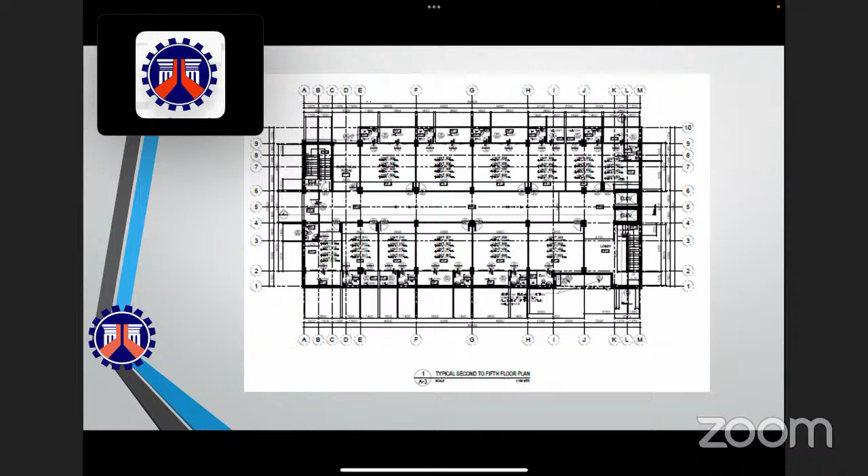Ground floor plan, typical second to fifth floor plan, roof deck plan, and roof plan. For the scope of work, the scope of works involves earthwork, finishing and other civil works, plumbing, carpentry.

And joinery, finishing hardware, doors and windows, ceramic granite tiles, painting works and railings, and electrical and auxiliaries. For the equipment requirements, the minimum major equipment requirements are the following.

Manpower requirements. The minimum work experience requirements for the key personnel are the following. The approved budget for the contract is 102,290,000 pesos and the contract duration is 300 calendar days.

Showing you the major and similar categories of works. The source of fund is FY 2025 NEP for DPWH Infra Program. For contract ID number 25D00049, construction of 5-story multipurpose building, Barracks, Camp Guillermo, Nakar, Lucena City, Quezon, Phase 4.

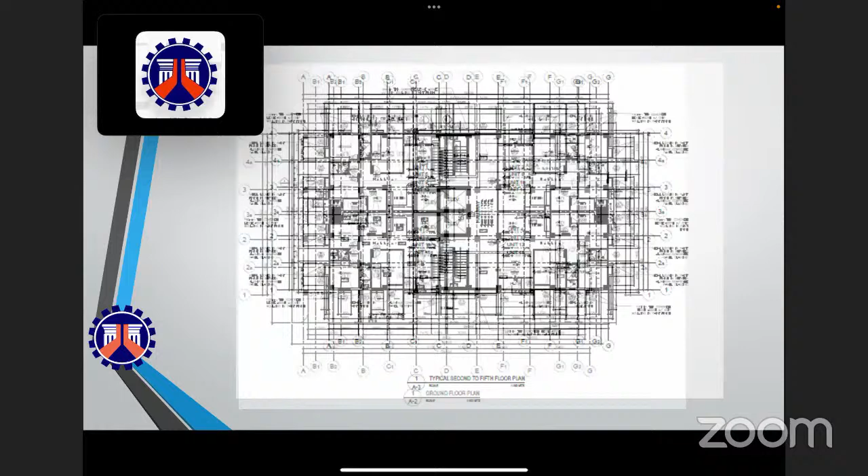Showing you the perspective, location map, vicinity map, and site development plan. Ground floor plan. Typical second to fifth floor plan. Roof deck plan. Roof plan.

For the scope of work, for architectural works: all windows, sliding, awning and fixed, all tiles, glazed and unglazed trims, granite, floor topping plain, cement floor finish plain, cement plaster finish, painting works steel and concrete, walls at fire pump room, louver blocks and CHB 150mm.

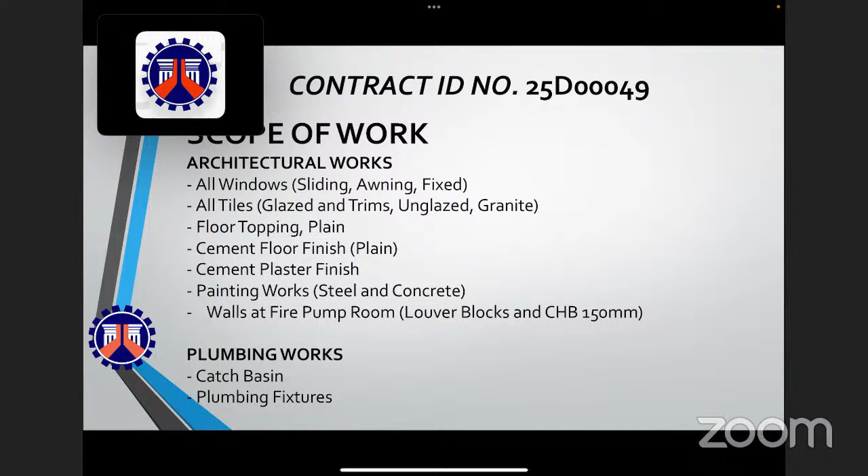For plumbing works, catch basin, plumbing fixtures. For electrical works, all generator single phase, network cabling, CCTV system, public address system, lighting fixtures and lamps. For mechanical works, installation of air conditioning units, exhaust fans, and elevators. For site development, sidewalk and roadway.

For equipment requirements, the minimum major equipment requirements are the following. Manpower requirements. The minimum work experience requirements for the key personnel are the following. The approved budget for the contract is 85,885,000 pesos and the contract duration is 300 calendar days.

Showing you the major and similar categories of works. The source of fund is FY 2025 NEP for DPWH Infra Program. For contract ID number 25D00057, asphalt overlay for Juanito Remulla Senior Road, kilometer 40 plus 916 to kilometer 41 plus 232, kilometer 41 plus 262 to kilometer 42 plus 118, kilometer 42 plus 148 to kilometer 42 plus 831, and kilometer 42 plus 921.

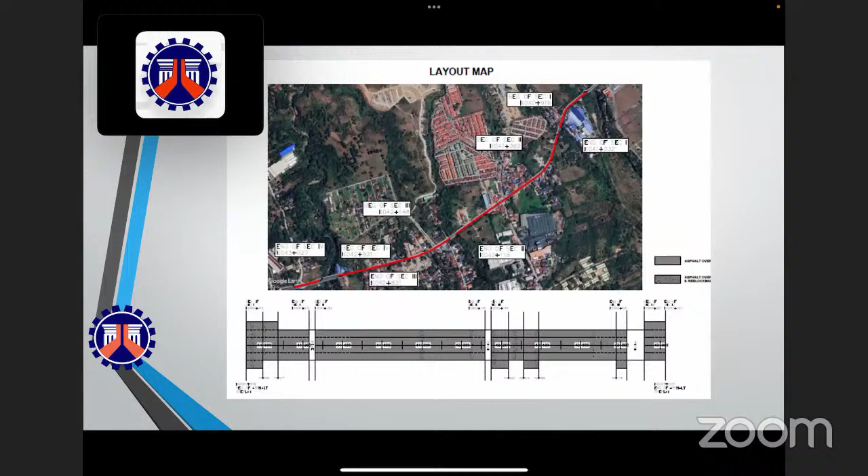to kilometer 43 plus 027. Showing you the vicinity map and key map. Layout map. Typical roadway section. For the scope of work, asphalt overlay. For the equipment requirements, the minimum major equipment requirements are the following.

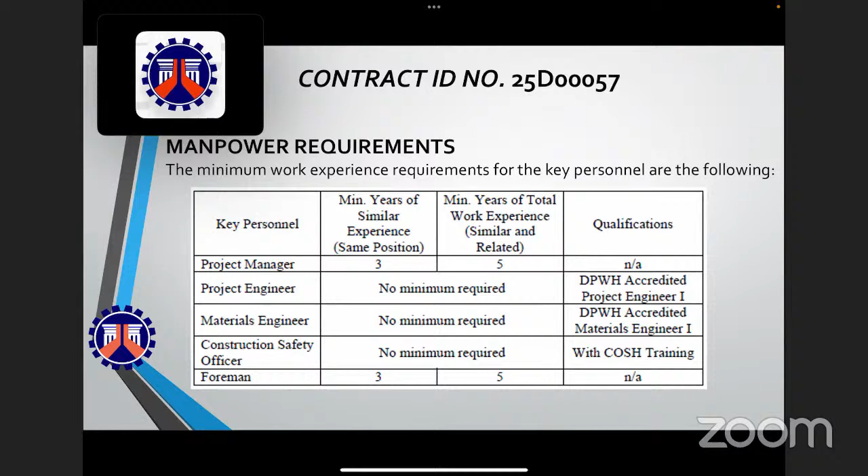Manpower requirements. The minimum work experience requirements for the key personnel are the following. The approved budget for the contract is 141,372,500 pesos, and contract duration is 165 calendar days.